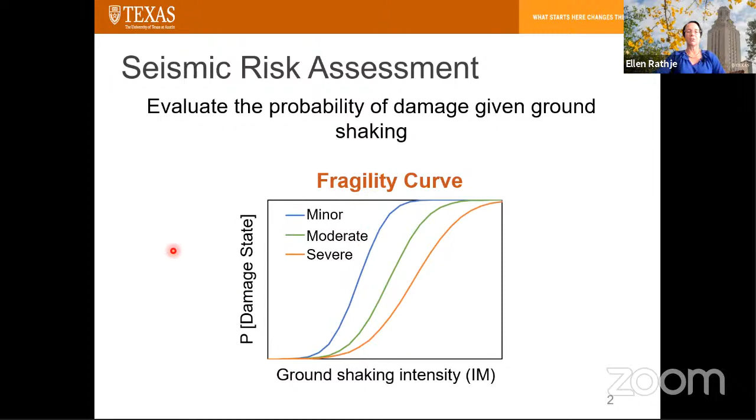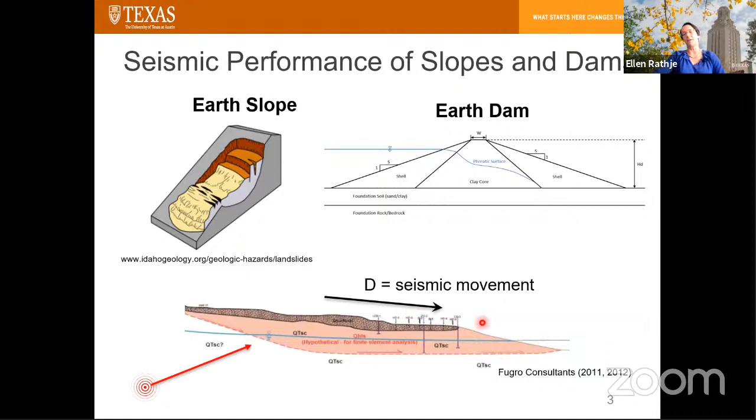Now, when we try and apply this to our problems, in this case, the seismic performance of slopes and dams, we know that the common way we evaluate performance, not damage, but performance, is through movement. So you can see here's a slump from an earth slope. So we might try and predict the displacement. In an earth dam, we might predict the settlement. So in these cases, we typically want to know under the level of earthquake shaking, what type of co-seismic movement will be induced by the ground shaking.

Now, traditionally, for many decades, we've used the sliding block approach to do this evaluation. And in that case, we look at the slope and we find a critical failure surface and define KY, the yield acceleration for that sliding mass. And that yield acceleration represents the horizontal force that, when applied to the sliding mass, results in a factor of safety of 1. So the idea being that any acceleration or force bigger than KY results in a factor of safety less than 1, and therefore movements.

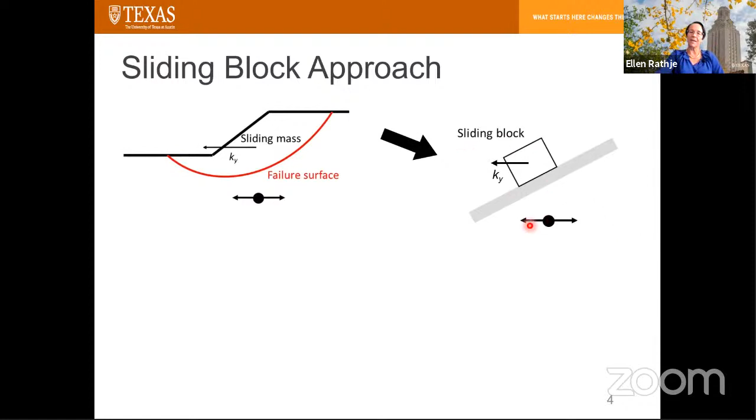So we take that yield acceleration and we idealize it as a sliding block, sliding down an inclined plane, so that now we have accelerations going in to this block with a yield acceleration. Here's our earthquake motion. And on each of those excursions beyond the yield acceleration, we get some downslope movement. And ultimately, it's this downslope movement, in this case, a little over 20 centimeters, that we use as an indicator of the seismic performance of this slope.

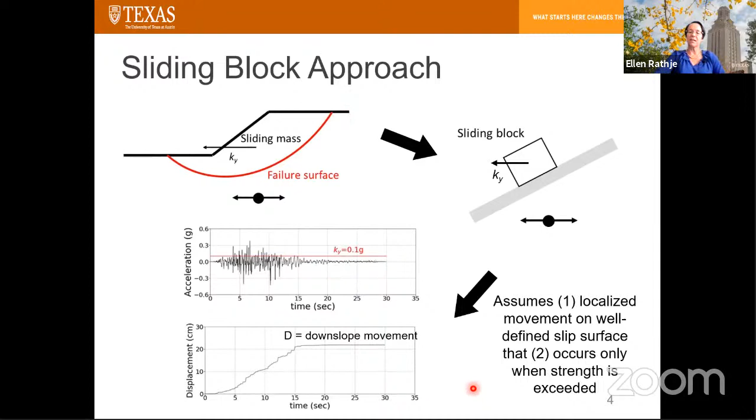Now, as many of our analyses do, we have to employ several assumptions. In this case, the two main assumptions we bring into this is that all deformations and movements are localized on a well-defined slip surface. We're essentially assuming it's all along this failure surface, or in this idealization, along this inclined plane. And then the second assumption is that movements only occur when the strength is exceeded, because KY represents when the strength is mobilized. And so if the strength is not exceeded, we have no movement at all.

Now, when we do these analyses, we have to make some assessments of the sliding mass itself. The geometry and engineering properties of the slope go into assessing the yield acceleration, which I already introduced. So that represents the seismic resistance of the slope. But we also want to incorporate the dynamic response of the sliding mass. And so we typically use some sort of natural period to do that. I traditionally have used the initial period of the sliding mass, represented by 4 times the thickness of the slip surface, divided by the average shear wave velocity. So this uses that one-dimensional assumption in assessing that dynamic response.

Of course, this analysis then also requires some estimate of ground shaking. And of course, when we worry about ground shaking, we always have to incorporate not just the intensity of shaking, but I'm a big believer that frequency content plays as big of a role as intensity, and then duration also can come into play.

So when we look at predicting displacements, and throughout this talk, I'll use capital D as representing displacement, I'm sure many of you are aware of the empirical models that have been published. You can think of them as surrogate models. They allow you to predict the displacement as a function of these various parameters without actually having to run the sliding block analysis yourself. So they're a surrogate for doing the full analysis, which requires a lot more work. You've got to pick ground motions, you've got to do your dynamic response calculations, et cetera. So in some ways, we do all the hard work for you and then develop statistical models that predict displacement. And there are many that have been published. There's two just listed here, John Bray and his group, as well as the work that I've done since working with John many decades ago now.

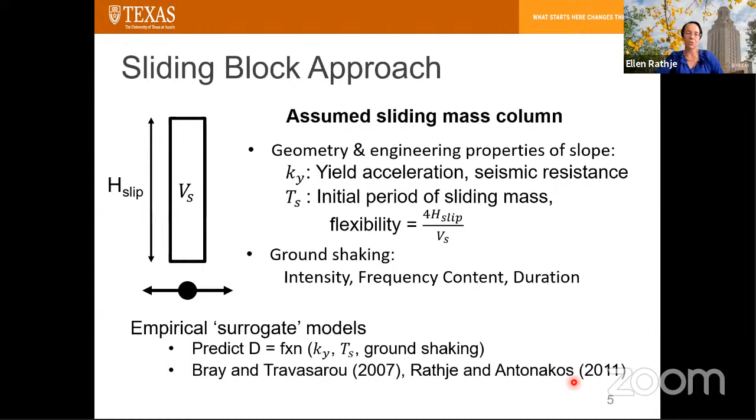Now, of course, we are in the 21st century and we're moving more and more towards stress deformation analysis. So this could be finite element or finite difference analyses. So we take our slope and we create a finite element or a finite difference mesh, and we put our earthquake motion in the base, and then we can compute the displacement at the ground surface of the slope. And I would argue that is really what we care about, because typically what we're worried about damaging is actually at the ground surface.

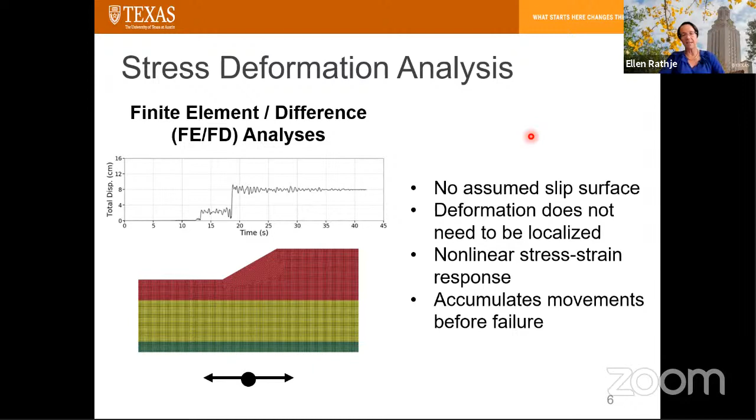Some of the benefits of stress deformation analysis is there is no assumed slip surface, so we don't have to make any of those assumptions. The deformations do not need to be localized. So the two main assumptions I mentioned earlier don't need to be employed. We can more rigorously incorporate the nonlinear stress strain response, and we can accumulate movement not just during failure, but due to the nonlinear response before failure. So for all these reasons, people are tending towards stress deformation analysis.

So with that kind of background, I want to focus on two main topics within this idea of looking at the seismic risk assessment of dams and slopes. So first, I want to expand on this fragility framework that I mentioned as applied to earth slopes and dams. So I'll introduce what people have done in structural engineering and how we can adapt it for earth slopes and dams.

And then an important part of that fragility framework is predicting those deformations through these type of surrogate models that I introduced. So I'm going to talk about some of the more recent work we've done, just recently accepted in Soil Dynamics and Earthquake Engineering and almost accepted in the ASCE journal, where we used finite element analyses to develop a suite of displacements that we then performed classical regression on, similar to the Bray and Travasarou or the work that I've done with Antonakos.

But we're also really trying to dabble into these new AI and machine learning techniques. So I'll talk about a model we developed using an artificial neural network, and importantly, comparing and contrasting the performance of these different statistical techniques.

So let's talk about the fragility framework first. When we start dealing with fragilities, the first thing we have to do is to identify the engineering demand parameter that's going to be pushing the system towards damage. Importantly, this engineering demand parameter, EDP, must be computable. You must be able to compute it from an engineering analysis because we need to be able to assess it. And of course, it must be relatable to the damage state. For instance, the damage state in a building may be the level of cracking. And all of these things depend on the system that you're considering.

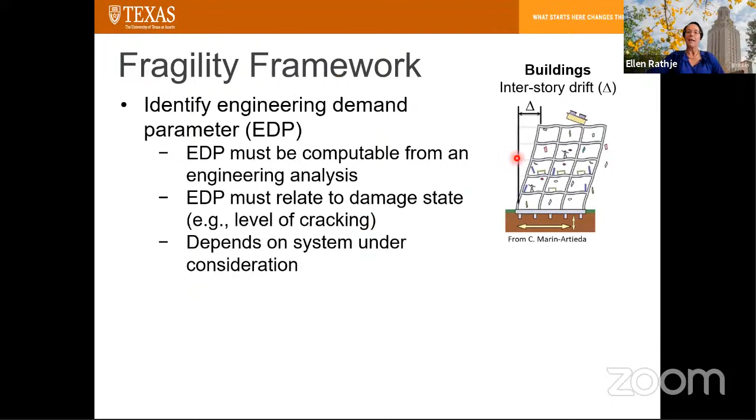A building should not be analyzed like an earth slope, but it's still useful to see what the structural engineers do. For instance, where cracking may be the damage state that they're interested in, they found that interstory drift is the engineering demand parameter that relates best to cracking, or at least relates well to cracking. And so they'll run analyses that compute interstory drift and relate that to the damage level.

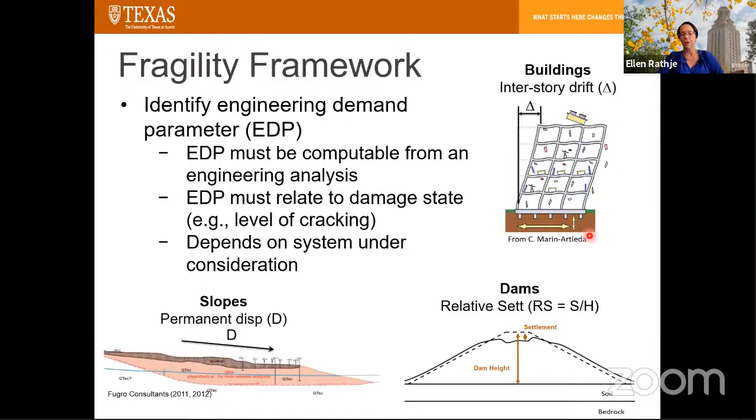Now, of course, once we talk about slopes, interstory drift doesn't mean anything. So in dams, commonly what's been used is relative settlement, the settlement of the crest relative to the height. And in slopes, we've used permanent displacement D, although you could argue about how you should represent that displacement relative to the settlement. I'm not sure many of us have really gone through the rigor of trying to assess how that actually relates to damage.

So going back to the fragility framework, there's really two main components, and it all relates to this engineering demand parameter. First is the seismic demand model, and that takes the intensity measure, again, peak ground acceleration, something like that, and predicts that engineering demand parameter. So we're trying to go from ground shaking to this relative settlement or interstory drift. The seismic capacity model then takes that engineering demand parameter and predicts the probability of the different damage states. So this is trying to understand how, for instance, interstory drift relates to different levels of damage in a building, or in our case, damage in a dam.

The surrogate models I've been talking about, and I think this is where the geotech world has done a really nice job. We've spent a lot of time on these surrogate models, and I'll spend a lot of my talk today on them as well. But the part we haven't done such a good job with is how we put those together, including their variability and uncertainty, with the demand and capacity into the fragility model. Because remember, the fragility model goes from ground motion to damage. And the engineering demand parameter is kind of the mechanism that makes that relationship work.

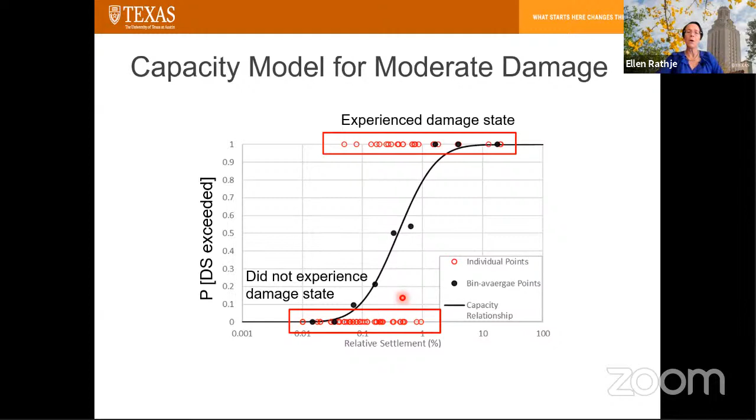Now, traditionally in geotech, we like thresholds. We don't like probabilities like this. And in fact, that's what Pells and Fell and Swaisgood did with essentially the same data. They said, well, for moderate damage, less than 0.2% is not moderate. Above 0.2%, you do get moderate damage. And they felt they needed an absolute threshold.

But that essentially represents this type of boxcar fragility curve, or not fragility curve, I should say capacity curve or cumulative probability curve. But clearly, some of the dams less than 0.2 did experience damage, and some above 0.2 did not experience moderate damage. And Swaisgood did something similar, but they used a different threshold. They used 0.5% of relative settlement.

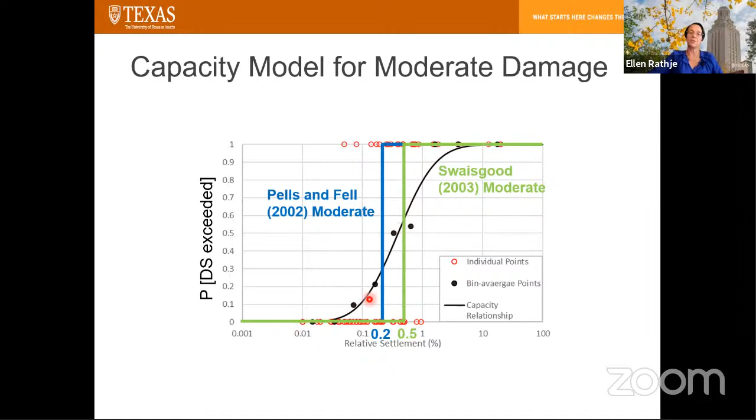So this expands and enhances what had been done in this previous work by considering the fact that there is uncertainty in assigning the damage state at a given value of relative settlement. And we did this for 3 different damage states, as I mentioned, and this was published in our paper for the conference, and you can learn a little bit more about it there.

But what you see here is minor damage is much further to the left. Okay, so that means that a lot less settlement is needed to get just your minor damage, a little bit more to get moderate, and then a bit more to get serious. And in fact, these two are more similar to each other than the minor damage.

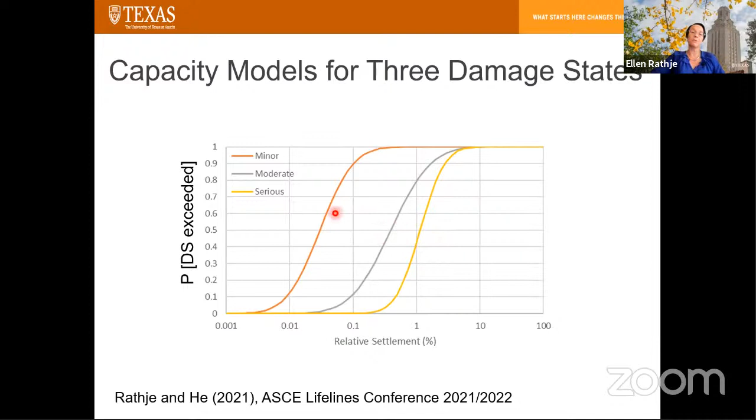And just to show you a simple example of how I can use that capacity relationship, that's not a fragility curve, it's a capacity relationship. But I can use it to develop a fragility curve for a specific dam, as shown here. And again, this is also in the paper. So let's say I have a dam 15 meters high. Its yield acceleration is 0.15 g. I'm going to do this all within a sliding block framework. We've got uncertainty on the ky, so I'm going to put a sigma there.

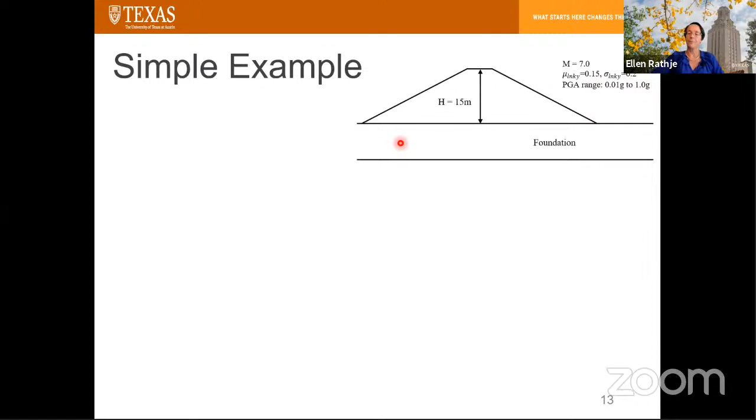And for the demand model, the surrogate model, I'm just going to use one of my displacement models that I published more than a decade ago now with Gökhan Saygili. And we are going to make the assumption that the displacement that comes out of Rathje and Saygili, which I would assume would be on a slip surface, can be used as the settlement at the top of the dam, which is an assumption.

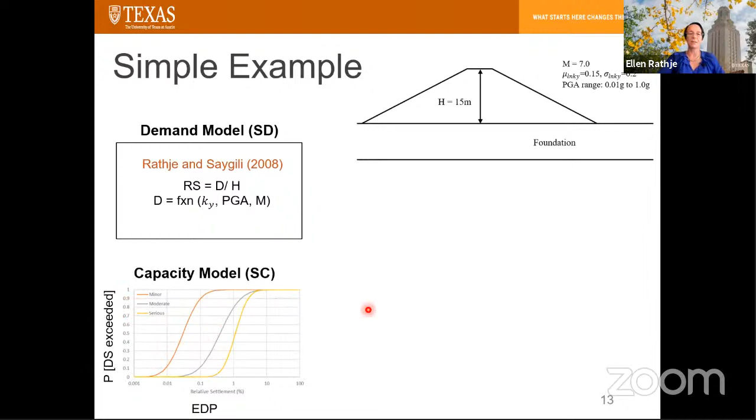But we're going to calculate the relative settlement from that demand model. And we're going to just consider a range of PGA values from 0.01 to 1 G. And we're going to combine that with the capacity models that I just showed you on the previous slide. So relative settlement will go into here, and then that'll allow us to get the probability of the damage being exceeded. And there need to be some Monte Carlo simulations in this arrow. So arrows are never as simple as they seem on the slide.

But by taking the variability and uncertainty here, including the uncertainty in KY and the uncertainty in the capacity of the dam, you can then develop a dam-specific fragility model, which in this case would say for this dam, at 0.4 G, for instance, here's the probability of serious damage, here's the probability of minor damage. So clearly, serious damage should have a lower probability than the lower damage state.

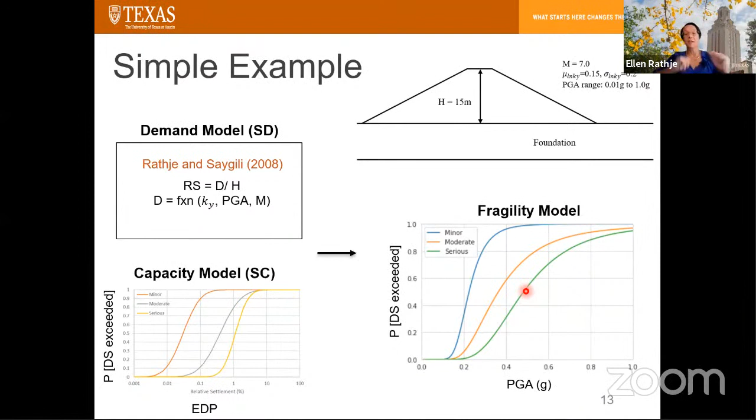So this is a very useful graph to have, because if an earthquake happens in your area and you get your shake map from the geological survey, and you find out the ground shaking at your dam was 0.2 G, you may say, you know what, I'm not too worried. But if it starts heading up into this zone, you should start being a little bit more concerned. And if you can apply these fragility models to your entire inventory of dams, let's say you're a dam owner, you can very quickly prioritize which dams you need to go inspect.

So the rest of my talk is going to focus on the demand models, because I had to make some big assumptions in that previous analysis to go to the fragility model. So I'm going to talk about how we can do better in terms of predicting movements of slopes given ground shaking intensity. So this is when we'll move to the second part, where I will talk about our classical regression as well as our ANN models, which are based on the finite element study.

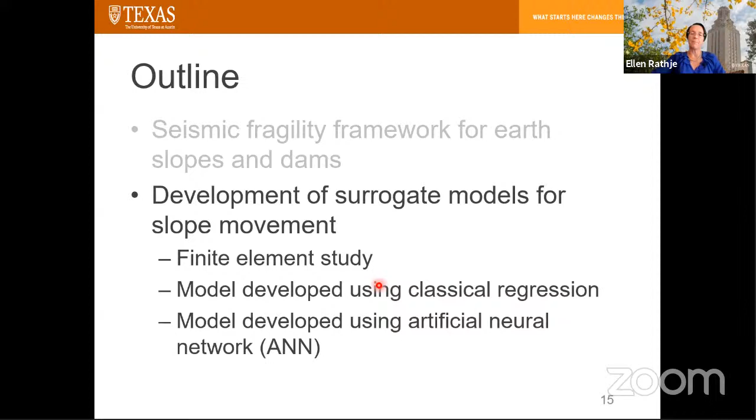So we developed 49 finite element slope models that we analyzed. We varied many of the parameters. So you can see we basically have a single slope here. The height of the slope was varied between 15 and 30 meters. The depth of soil beneath the toe of the slope was varied. So sometimes it went deeper, sometimes it stopped right here. We did different slope angles of 20, 30, and 40 degrees. We assigned different strengths, either C-phi combinations or phi equal to 0. And we varied the shear wave velocity between about 200 and 400 meters per second.

So this material here is the main slope movement, or I should say the layer where the slope movements are associated. We do have a stiffer layer, which is given a stronger property, so there isn't much movement there. And then we have a bedrock layer, and then we apply the shaking with a Lysmer dashpot at the base.

Now, it's a lot harder to run finite element analyses and do suites of properties as opposed to what I did previously with sliding block analysis, where I just say, oh, KY is this. So here we had to think about how we are going to model the stress, strain, strength properties of the materials. So we had some phi equal to 0 materials with different cohesion or undrained shear strength. That should lead to deeper sliding surfaces.

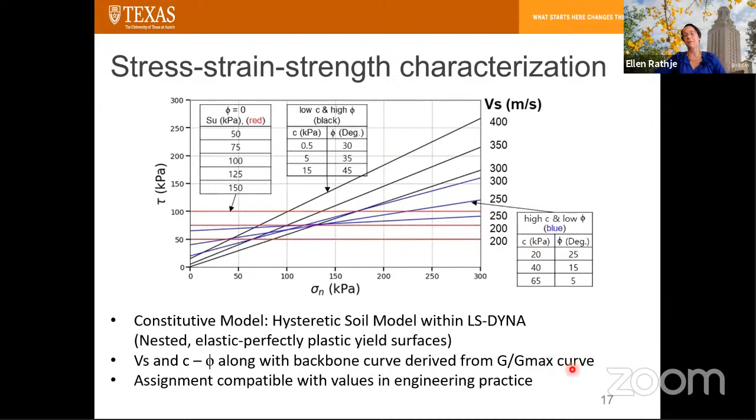We ran all of these analyses in LS-DYNA. We ran them on the supercomputers at the University of Texas, at the Texas Advanced Computing Center, through an allocation provided by DesignSafe. So again, this all kind of fits in with the DesignSafe framework, as I mentioned earlier. We use the hysteretic soil model that's available in LS-DYNA, where the stress-strain curve is assigned based on a backbone G over Gmax curve. So it gives you a lot of flexibility for assigning the stress-strain properties.

So as I mentioned, we analyzed 49 slope models. And of course, we were not going to just run a slope model without doing your traditional limit equilibrium analysis, because that's really how we think. And so for each slope, we ran a limit equilibrium analysis. We defined its yield acceleration, and we looked at its slip surface, and we defined the maximum thickness of the slip surface, which we called H slip.

And so in varying our properties, we wanted to get a good distribution of KY. So this plot here shows the range of yield accelerations and period of the slip surface, which is defined here based on the shear wave velocity and the thickness of the slip surface. And you can see we've got KY values as low as about 0.025 G up to about 0.5 G. We've got sliding mass periods from about 0.05 seconds to 1 second. So we're trying to really hit a range of slope parameters.

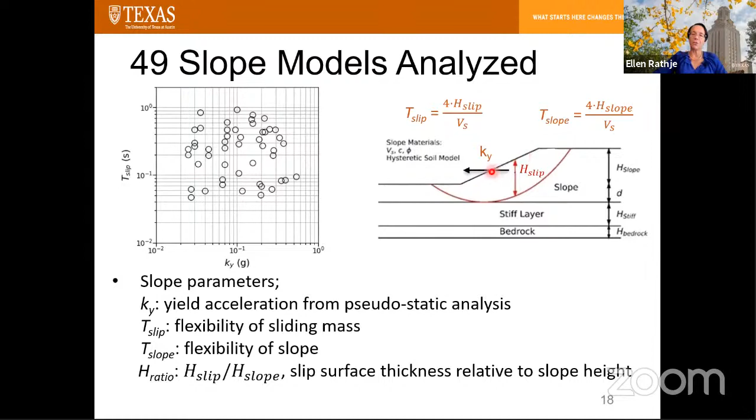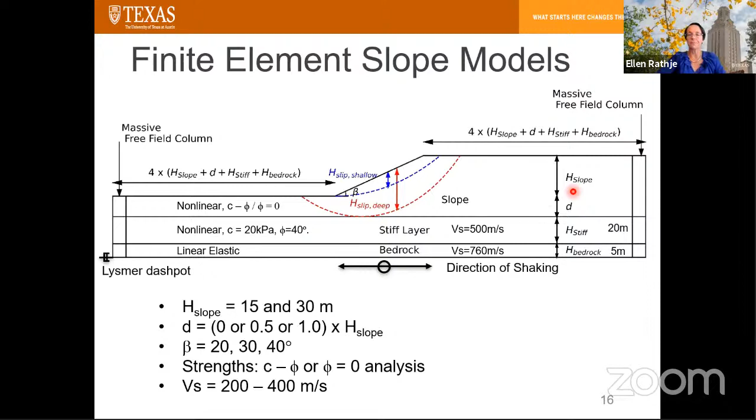We did ultimately find out that the slip surface was not the only parameter of interest. So we also are going to look at the period of the slope as a whole, which is represented by the slope thickness here. And you'll see me talk about H ratio, which is the ratio of the slip surface thickness to the slope height. So for small values of H ratio, that means we've got shallow slip surfaces like this. Okay, so that'll be a small H slip relative to the slope. As H ratio gets bigger, we're talking about deeper slip surfaces because H slip is large relative to H slope. So you'll see I'll talk about H ratio as well.

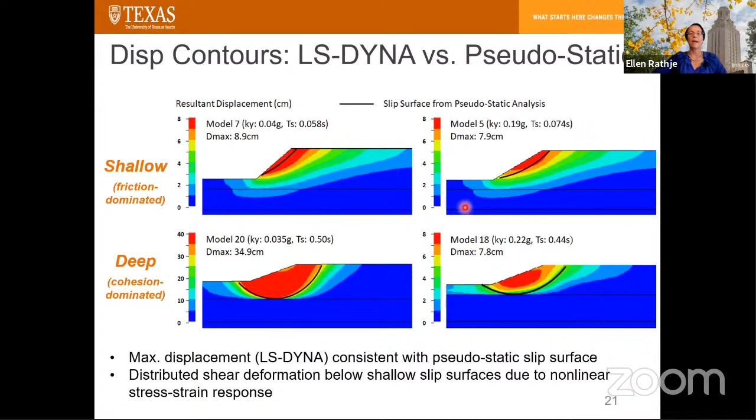So I would say the maximum displacements are consistent with the pseudostatic slip surfaces. But one thing to notice that was a little surprising was for the shallow failure surfaces, how much displacement was happening below the slip surface. And this is going to lead to some interesting trends when we start looking at the statistical analyses.

So how do we now take these 50,000 displacement values and come up with a classical regression analysis to predict displacement? What we did first was we had to identify which intensity measure best predicted displacements. And the way we did that is we looked at each slope independently first, before we started combining things together.

So this is for one specific slope that has a KY of about 0.2 g, a period of about 0.05 seconds. And these are for the 1,000 plus ground motions, displacement as a function of PGA, PGV, Arias intensity, and CAV. And we just fit, this is log, we just fit a straight line through the data.

First thing you notice is the least scatter in the data is for peak ground velocity. So the scatter in these black points vertically is much less than any of the other models. And in fact, that's borne out with the sigma of the natural log of the displacements for the different regression models, almost 0.8 for PGA, about 0.42 for PGV, over 0.6 here, over 0.8 for CAV. So this starts to show you that PGV may be a good candidate for our intensity measure.

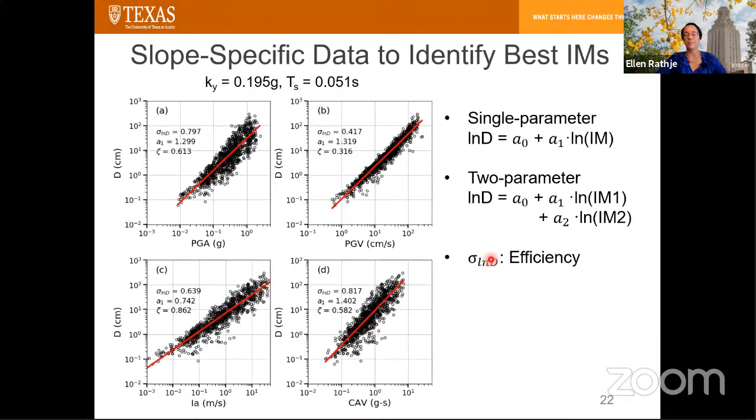We did the same thing with combining intensity measures. You can't really show the three-dimensional plots, but we did the same type of regression using combinations of intensity measures like PGA and PGV, PGA and mean period, and just computed the sigma to see how they compared. And again, we did this for each of the 49 slopes.

So in the end, we said PGV wins, not only because it was similar here, but if you're doing any type of probabilistic analysis, it's much easier to predict a single ground motion parameter as opposed to two ground motion parameters and having to consider how they're correlated with one another. So everything else I talk about today will use peak ground velocity as the intensity measure.

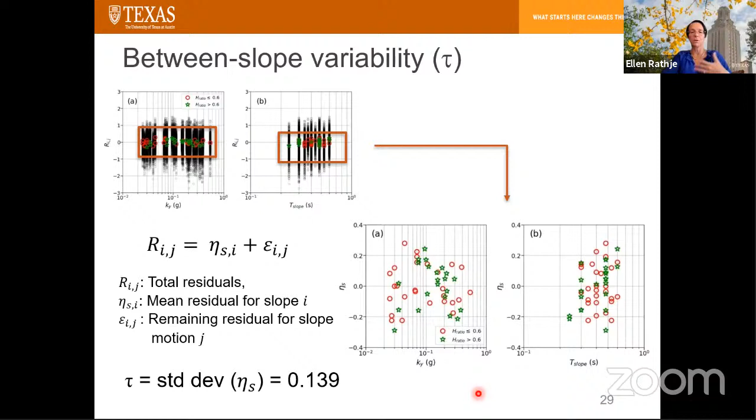And so we take those red and green points, and we can kind of zoom in. We can call those eta, which would be the mean residual for each of the 49 slopes. And we calculate the standard deviation of these eta values, and it's 0.14, which is actually pretty small. And we saw no systematic variation with slope parameter, which is good. That means we're not biased for any type of specific slope geometry.

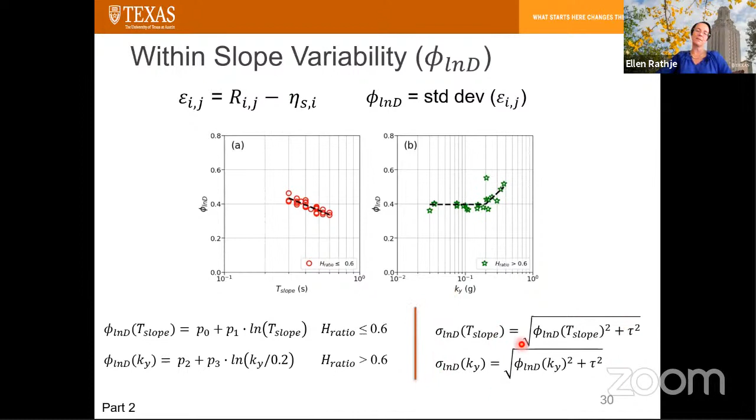And then the remaining variability is computed by taking that total residual and subtracting the mean residual for that slope, and that's the remaining epsilon. We calculate the standard deviation of those epsilons, and that gives you phi. And you can see, in this case, the phi was almost always right around 0.4, although it varied a little bit with T-slope and a little bit with KY for the deeper slip surfaces. So again, we have a model for phi. And so the phi and the tau get combined together to represent the sigma for your slope.

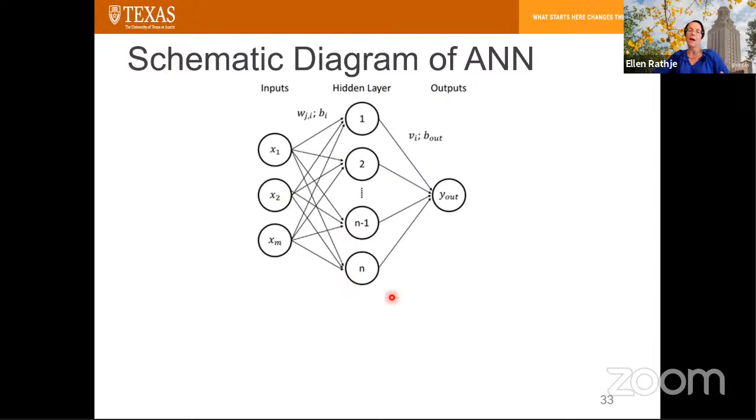So here's a schematic diagram of an artificial neural network. The key thing is we've got these neurons in the middle and hidden layers that are going to relate input nodes to outputs. As you've probably heard of ANNs before, this mimics the way a neural pathway would work in a biological system, where these inputs go into these nodes in a complex way, and then feed out the other side. The question is, what do all these arrows mean, and how do they work towards developing a predictive model? In our case, if you look at how the inputs feed into the hidden layer, you've got your inputs, and it's actually relatively simple.

You're going to multiply each input by an appropriate weight. These are the weights that are associated with each input. You multiply the weight times the input, sum them all up in the summing junction, add the bias to calculate a number z. You put z into an activation function, which then outputs something that goes right into this neuron. All the inputs are going into each one of these, and the weights are different depending on which inputs are going to which neuron. When you get to the outputs, it works very much the same. Now you've got these values of y in the middle. There's another set of weights, another bias, another activation function that predicts the displacement.

So in our case, similar to regression, we've got our inputs, KY, T slope, H ratio, coming in on the left-hand side. We give the model the displacements on the outside, and the ANN defines all the weights and biases that do the best fit to the data. The key is there can be complex patterns in the data that are hard to model in a traditional regression approach. The power of the ANN is the flexibility to find those patterns in the data and then model them.

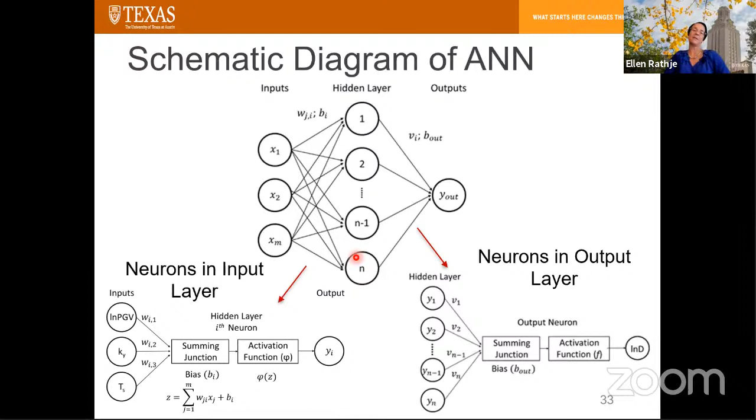So in our analysis, we use the training data to derive the weights and the biases, as I mentioned. Now, one thing that we rigorously do in this type of analysis, which we should probably do more of in classical regression analysis, is to hold data back. So we call that the testing data. It is not used in the training.

And we use it to select some of the things I kind of glossed over, like how many hidden layers. You can have more than one. How many neurons in the hidden layer? What's an activation function, and which one should I use? So we're going to use those to pick those values. But even more importantly, we use the testing data to evaluate the model that was developed with the training data. And it ensures that the model is generalizable to other data.

You've probably seen those plots where someone has variable data and they just put a huge spline, a high order spline, through all the data. It goes exactly through every data point, right? Perfect match. But you add one other data point and all of a sudden it doesn't fit that data, right? That's called overfitting. And the same thing can happen in this type of analysis.

By using the testing data and evaluating the model on the testing data, it allows you to avoid this overfitting, where you're fitting trends that are only in the training data and are not generalizable to the entire data set.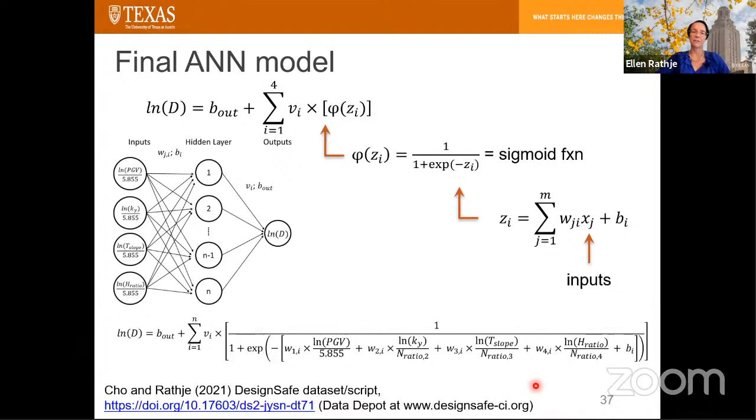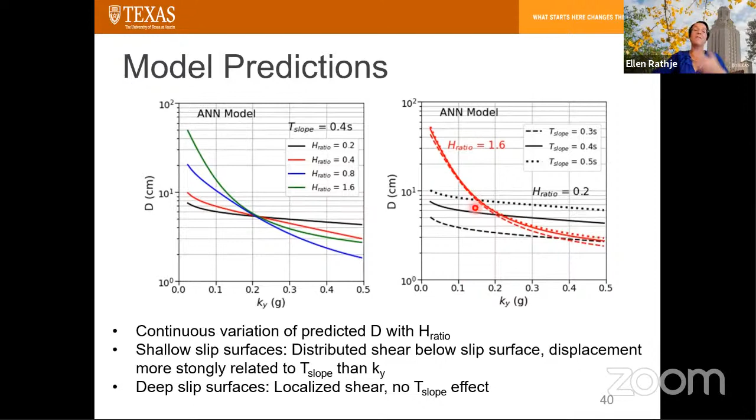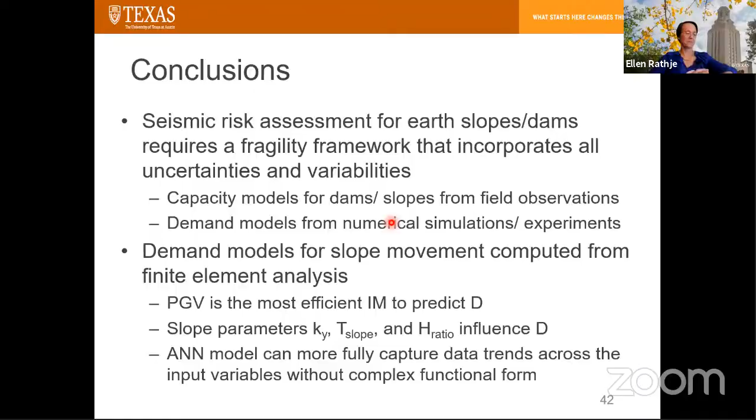The person says, I wanted to know how the ANN was performed, like which software or where the networks were programmed. Yes. The person is very interested in the application of this analysis in geotechnics. I think this is a great tool that cannot be applied only to slopes, but you can apply it to many other geostructures, right? Right.

So in this context, the colleague here wants to know how the ANN was programmed. Sure. Let me talk towards that, because it allows me to promote DesignSafe a little bit more. So my PhD student, Yubin Cho, used the scikit-learn package, Python package, Keras and TensorFlow. So these are kind of AI toolkits, all done in a Jupyter notebook, running on DesignSafe.

And for the person out there, if you go to our DesignSafe data set, not only do we have a Jupyter notebook that does the model predictions, we have a Jupyter notebook that shows you how we trained the ANN model. And so you can take a look at that and get all the details, because like most professors, I don't know the details. The student knows all the details.